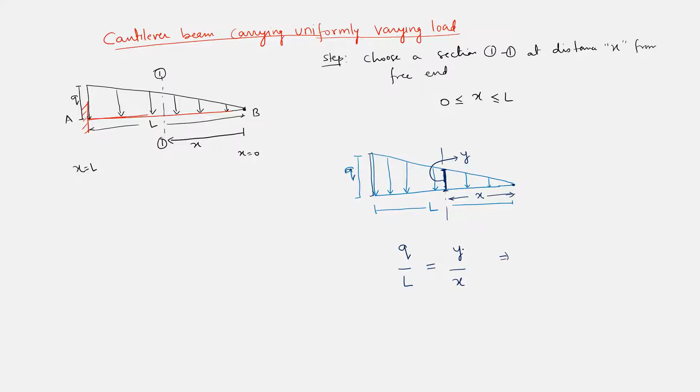अगर हम ट्रायंगल लॉ लगाएं तो हमारे पास होगा q (टोटल मैग्नीट्यूड) डिवाइडेड बाय कैपिटल L, equals to this value y upon this length x. So if you want to find out what is the magnitude y, then we can write y equals to q x upon L.

ठीक है, y is equals to q x by L। तो इस जगह पे हमें पता चल गया कि इसकी मैग्नीट्यूड क्या होगी, q इंटू x अपॉन L। If you put the value of x, then we will get y, the magnitude.

If x equals to 0 here, then we will put value 0, so it will become y would become 0. So yes, we can see the magnitude here would be 0.

Similarly at x equals to L by 2, means midpoint, what would be the value? We will put x equals to L by 2, then it would be q by 2, and at x equals to L we will see that q L by L, it becomes q. So our equation is correct.

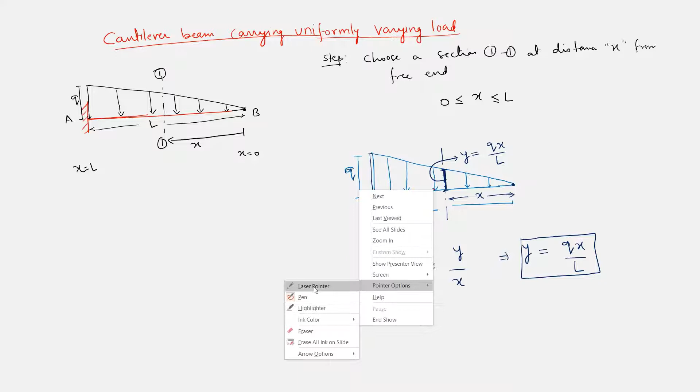Okay, so these are our equations. So now we will come back to the equation.

We will solve the problem that shear force at any section 1 is nothing but sum of all the transverse forces acting either on the right hand side or left hand side of the beam. So we will select the right hand side for our convenience. So on the right hand side, the shear force would be this much magnitude, this whole.

So we have to make it, because it is a running length, per unit running length, its unit would be nothing but q kilonewton per meter, qx by L or something. At this position we know the value is qx by L, so we will write it as qx by L running length.

So we have to make it an equivalent load, that would be the equivalent concentrated load. So how to make the equivalent concentrated load here? We'll see.

This is Qx upon L when this length is x. And we have to make an equivalent concentrated load, so its Cg would be somewhere here, acting here, so we will make it an equivalent P equivalent.

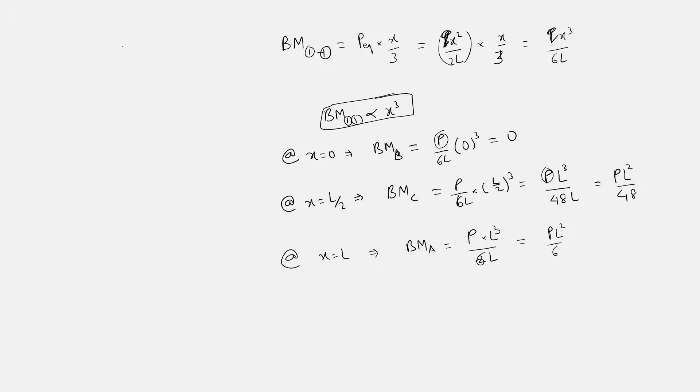Here we will see p used here definitely means we are using p as q here, so we can write it as q. So wherever we have written p, that is exactly q what we have written. So we are varying with q, it is by default only q.

Okay, so we have seen all three cases of the cantilever beam. Let's have a quick review.

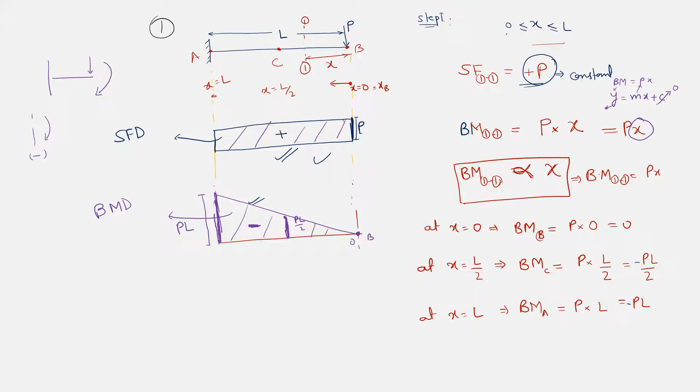This was the first case - a cantilever beam with a concentrated load. We have seen the shear force diagram as constant throughout the length, and the bending moment diagram was linearly varying, meaning a straight line variation. Then for the second case, we have seen a uniformly distributed load, and we have seen that the shear force diagram was linearly varying or a straight line, and the bending moment diagram was a quadratic variation.

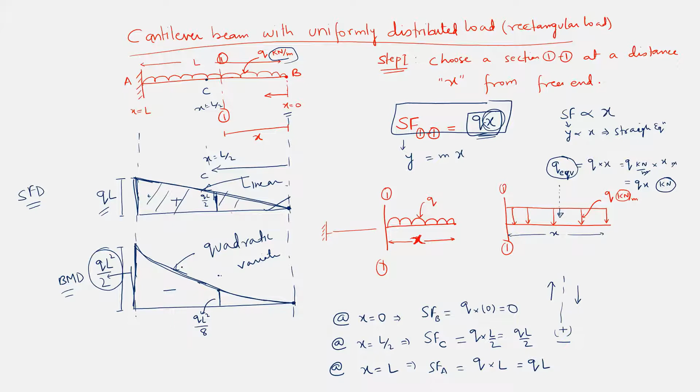Then we have seen further the third case - the cantilever beam carrying a uniformly varying load, where we have seen that the shear force diagram was varying quadratically, and the bending moment diagram was varying cubically.

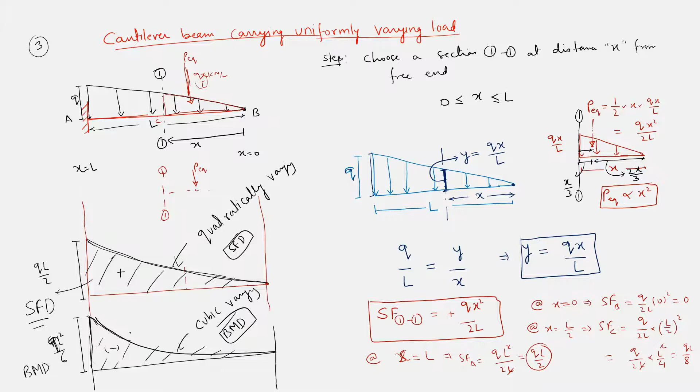So now we will have a general solution, a general equation for a beam. Let's solve a problem.

Let's take one. If we understand the concept of a cantilever beam for all three cases, then we will easily solve any type of problem on the cantilever beam. If there is one concentrated load of P, that is equal to any load, that value is 10 kilonewton suppose given, and a

uniformly distributed load, that is Q equals to 6 kilonewton per meter length. Now we have to solve this problem where the total length of the span

is given as 6 meter. From here, this end, we can say 3 meter, and we can say this as 2 meter, this as 1 meter, so total would be 3, 2, and 1. So let's say the total length is 6 meter.

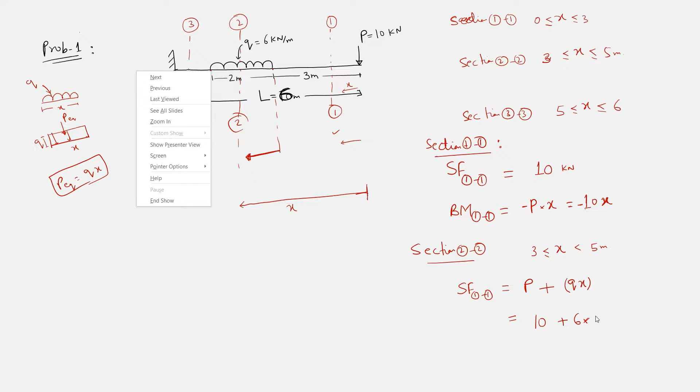Okay, so we will have this as P. P is 10 plus q is 6 into x, x is varying here from 3 to 5 meter. So we can say when it is at this position, x would be 3, when it would be here x would be 5, and at any point here it would be x. So let's have only general q into x. Okay, so this would be the shear force at this section 2.

Similarly, this would be shear force at any section 2, and bending moment at section 2. What would be the bending moment? Bending moment would be this force into perpendicular distance plus the magnitude of the force acting on the right side of the section into this distance. So first we have to convert it to the equivalent concentrated load, that is the P equivalent, and we know that for rectangular loading, the load would act at the CG. So it would be at x by 2.

Okay, so similarly we can say P into... for our easiness, instead of this we'll choose x from here only. And if we choose x from here, then we will put the value x 0 and 2. In that manner x becomes 0 here and x equals 2 here. So we will have this P multiplied by this distance, which would be 3 plus x. Okay.

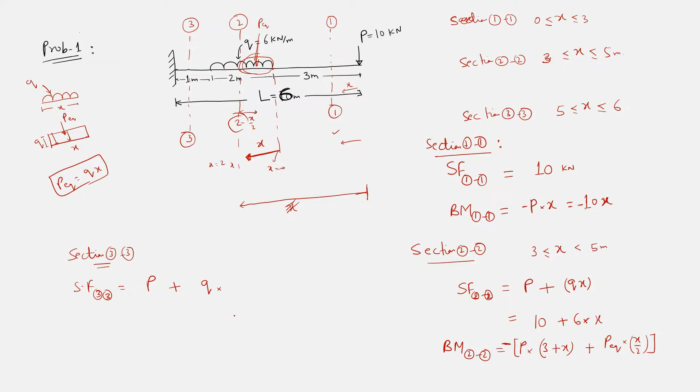So we will have the shear force at section 3 as sum of all the transverse forces acting either left or right side of the section. We will take all the loads on the right hand side of the section. So that will be P plus this total load. We know that Q into total length 2, so Q into 2 would be the total load. Any more load acting? No. So this would be the shear force.

On the right side of this section, this much load would be acting, the sum of this plus this. Now, bending moment at section 3, what would be the bending moment? If we choose the section from here only, x, then it would give P into this much: 3 plus 2, 5 plus x.

And another, what would the bending moment due to this be? It will give the equivalent load, plus P equivalent, multiplied by the distance from this point to this section. So first of all, this would be half of the length, means total 2, then it would be 1 plus this section x, so it would be 1 plus x.

So we will have covered this, and we will put the minus sign here for this bending moment, because on the right hand side it would hog, and hogging would be negative, that's why this is also negative. So we will have this bending moment at this position: P into 5 plus x plus P equivalent into 1 plus x. So within all the three sections we are having the cases.

So for section 1, the 10 kN shear force will remain constant and the bending moment will vary linearly. So if you plot this diagram, this is a concentrated load P, and this is the uniformly distributed load Q. Then the shear force diagram and the bending moment diagram will be plotted. We have seen that in section 1 the shear force would be constant up to this position.

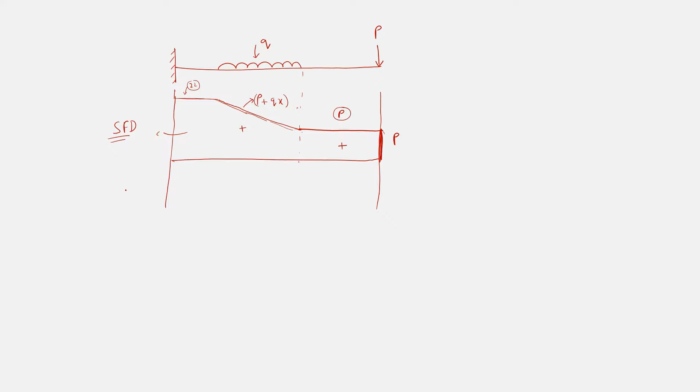Similarly we will have the bending moment diagram for it. This point load will give a linear variation for the bending moment. So the bending moment diagram would be linearly varying. If it is negative, then it is downward. So the linear variation. Then thereafter, what will this equation give? A quadratic variation.

Okay, so further we see that for this section, the bending moment at section 2 will have a further addition to the equation, and it would also vary. Section 2 would have a variation in the bending moment diagram due to P equivalent. If we write the P equivalent, what is the P equivalent we have calculated? That is Qx, Q into x.

So Qx into x by 2, then this position would be nothing but minus of 3 plus x into P plus q into x square by 2. So the higher order term gives a parabola, a quadratic parabola. So we will see that here the variation would be parabolic. Up to this position, up to section 2, we will have a parabolic variation.

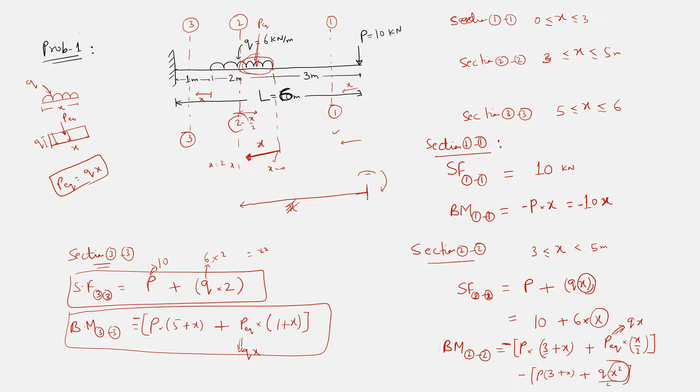Then what would be the next case? Third, P into 5 plus x plus P equivalent, that is nothing but Qx value, Qx into 1 plus x, then it would also be quadratic. So in this domain it would also have a quadratic variation.

So this would be the bending moment diagram. I am not solving the numerical value right now. I am just giving you a clue how we solve this problem. If a concentrated load, a uniformly distributed or a uniformly varying load is acting, how can we guess and roughly draw the shear force and bending moment diagram? This is a rough sketch: this gives a constant shear force, this gives a linear shear force, and at this position it will become a constant value.

Similarly, for the bending moment diagram, we know that this concentrated load will give only a linear variation and this would give a quadratic variation, so we have made a quadratic variation. So this is the bending moment diagram, and in this manner we can solve the problem. Next class, inshallah, we will try to solve some more general problems: if there is a cantilever beam having a concentrated moment m, how the shear force and bending moment diagram are calculated.